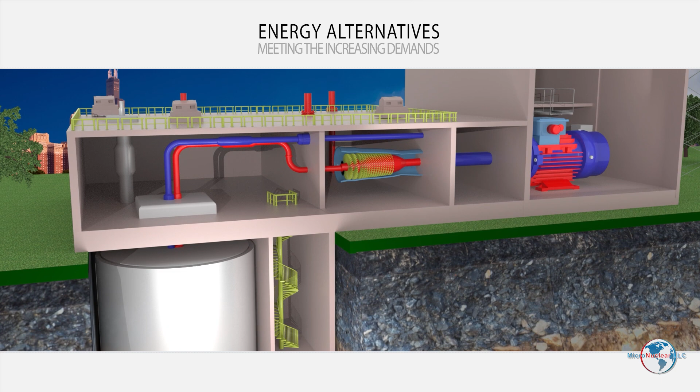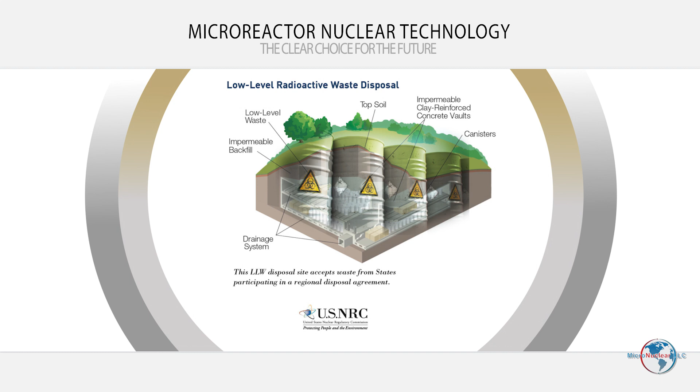When we examine the current realities of all forms of energy production, it becomes clear that only one technology has all the capabilities to meet the increasing demands of our planet: microreactor nuclear technology. This new type of reactor, from America's MicroNuclear LLC, employs a molten salt nuclear battery that, in a few short years, will be supplying a logical, safe, reliable, and economical solution that also resolves the issue of nuclear waste disposal.

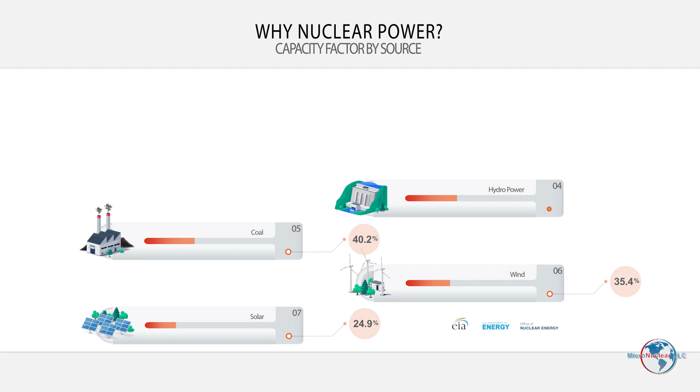To understand how transformative molten salt nuclear battery technology is, it is important to look closely at the specific requirements of competing technologies in their attempt to reach a goal of reliable, emission-free, environmentally friendly energy that is sustainable, reliable, and affordable. Capacity factors of these different technologies vary greatly, but none comes to the capacity of nuclear power, which is by far the most reliable and efficient.

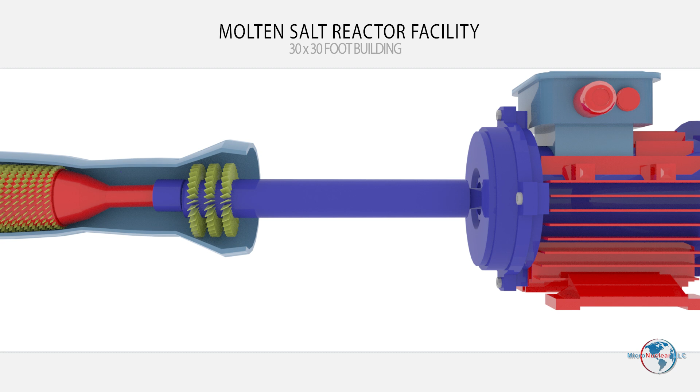The environmental and societal impact of generating facilities is massive. For example, a wind farm requires over 2,700 acres, while a solar farm can demand over 500 acres to produce the same 10 megawatt output as a quarter-acre facility that houses a molten salt nuclear battery. This is possible because the reactor vault and the commercial load equipment can be contained in as little as a 30-foot by 30-foot building installed above or below ground.

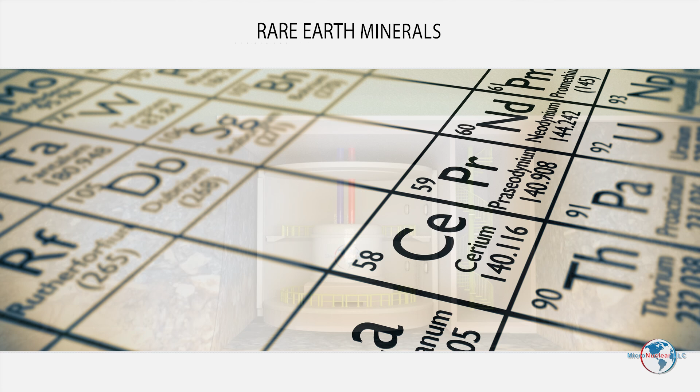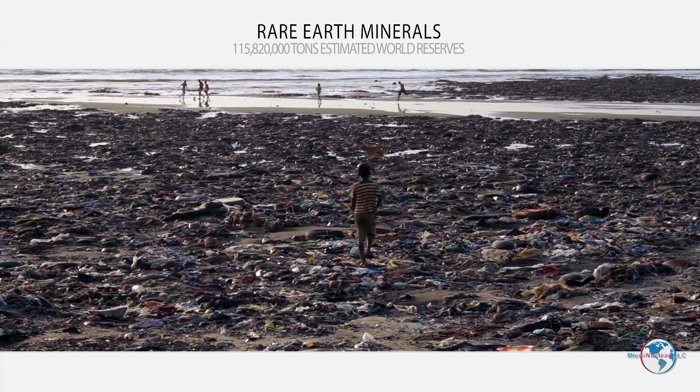Additionally, the reliance upon foreign sources for rare earth elements for battery production means energy security can be severely crippled by geopolitical events, while mining practices produce environmental and humanitarian crises around the world. The examination of all these facts makes the conclusion of the importance of nuclear power undeniable.

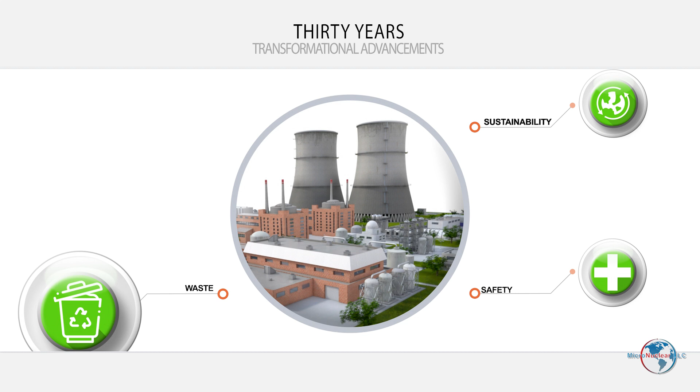But for over six decades, the perception of nuclear energy has remained unchanged, as the U.S. has failed to take advantage of the transformational advancements made in nuclear power science and technology over the last 30 years. The molten salt nuclear battery from MicroNuclear LLC will alter that course.

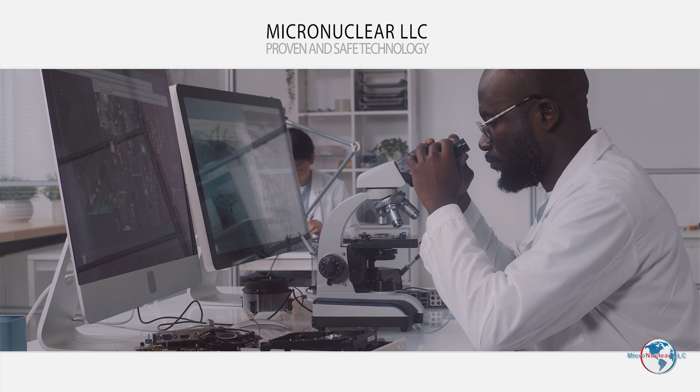At MicroNuclear, our primary objective is to revitalize and secure our energy needs using proven and safe technology that not only solves our existing energy needs, but opens an essentially unlimited potential to advance the security, reliability, and availability of our future energy needs.

Molten salt nuclear reactor technology is not a new concept, but one whose feasibility has been proven for decades, and the recent re-examination of that concept by MicroNuclear provides innovative design solutions that will change the entire energy infrastructure.

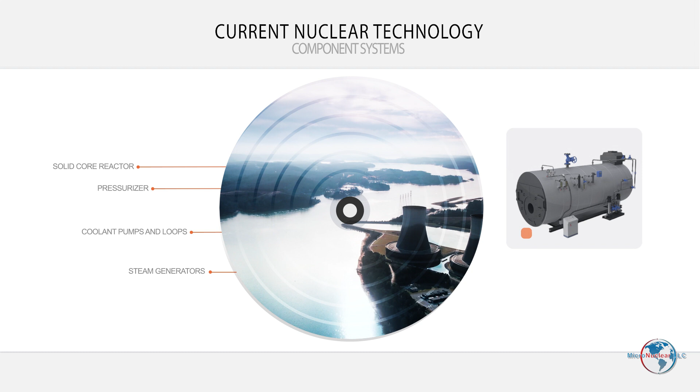To easily understand the difference between the molten salt nuclear battery and the traditional nuclear power plant, let's look at the operating flow chart of both systems. Traditional and current nuclear power plants are referred to as light water reactor systems with several components, including a solid core reactor, pressurizer, coolant pumps and loops, steam generators, turbine generators, cooling towers, and more.

These systems can reliably generate large amounts of electricity. 1,000 megawatts are not unusual. But those power plants require a large amount of land to do so, along with a complex operating system and support resources, many operational staff, and are very expensive to build and maintain.

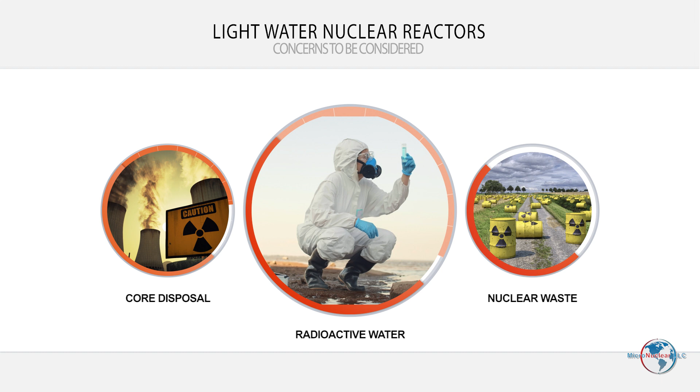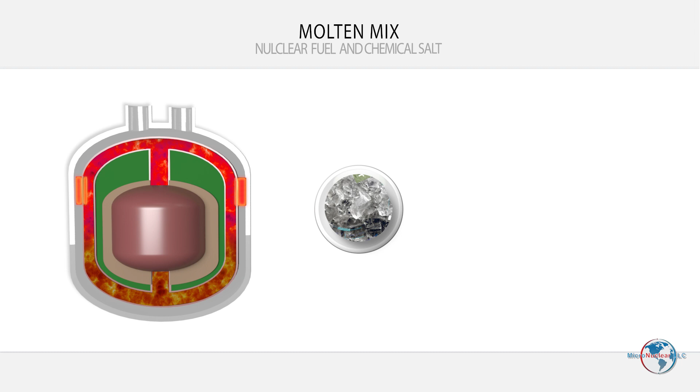The reactor core of the molten salt nuclear battery, or MSNB, is, as the name implies, a molten mix of nuclear fuel and a chemical salt. The salt in the MSNB is not your sodium chloride table salt. Instead, the MSNB uses fluoride salt because of its desirable characteristics when mixed with a nuclear fuel.

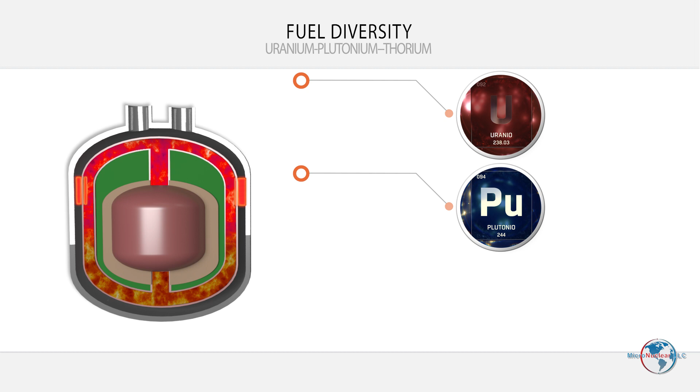As for the nuclear fuel in the MSNB, it can use either uranium or plutonium, and it can also run on fuel provided by thorium.

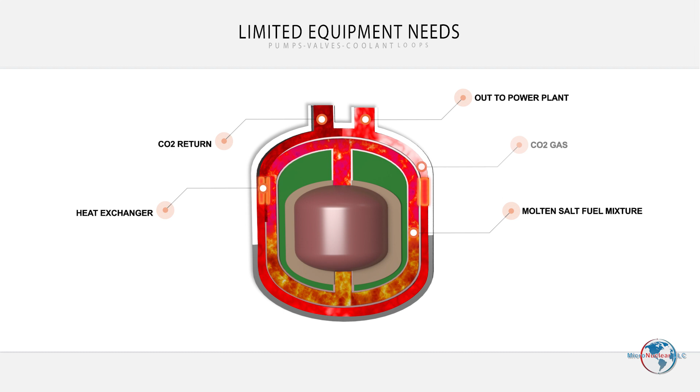Most importantly, the MSNB uses natural circulation to move the molten salt fuel through the reactor core and is thus designed without the need for pumps, valves, or coolant loops. The elimination of each of these components enhances safety and reliability while it reduces cost.

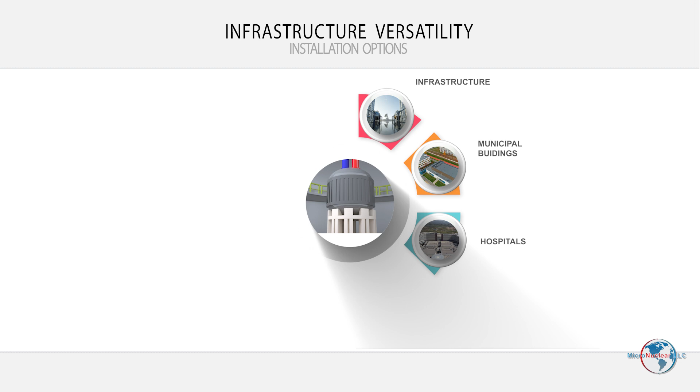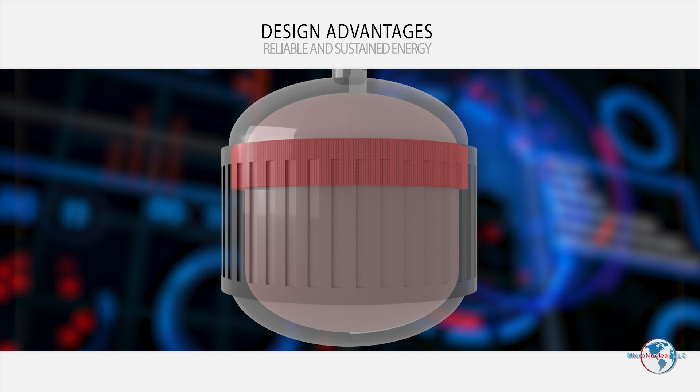It can be installed in critical infrastructure such as municipal buildings, hospitals, and military bases. It is ideal for industrial applications, desalination facilities, hydrogen production, and remote villages. The MSNB is designed to provide reliable and sustained energy, securing the absolute requirement of uninterrupted supply of energy.

Additionally, the MSNB development is mature. It is ready to produce the first prototype, be fueled with molten salt, and undergo operational validation.

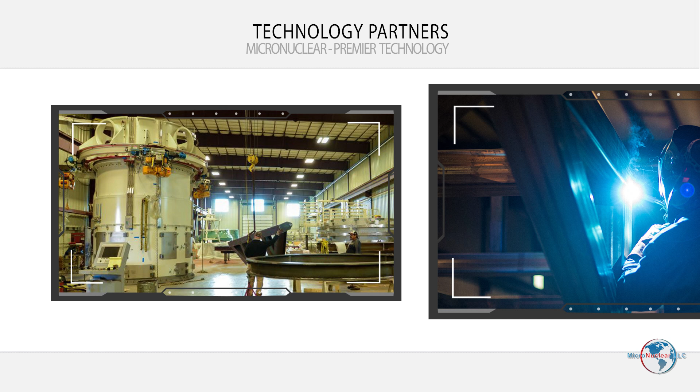Premier Technology is an industry-leading manufacturer of nuclear-grade equipment. Premier has supported MicroNuclear with the manufacturing of concept stage prototypes and has the facilities, personnel, and experience needed for full-scale production.

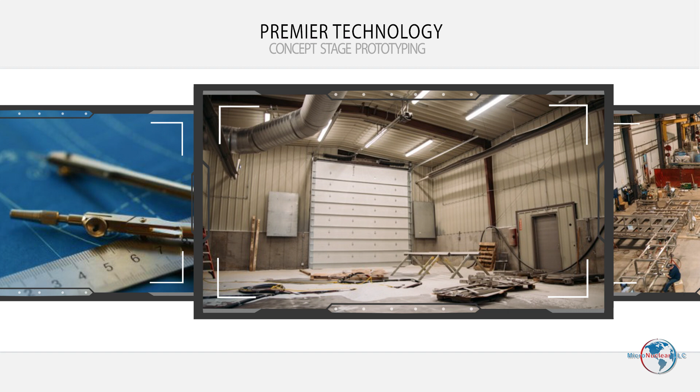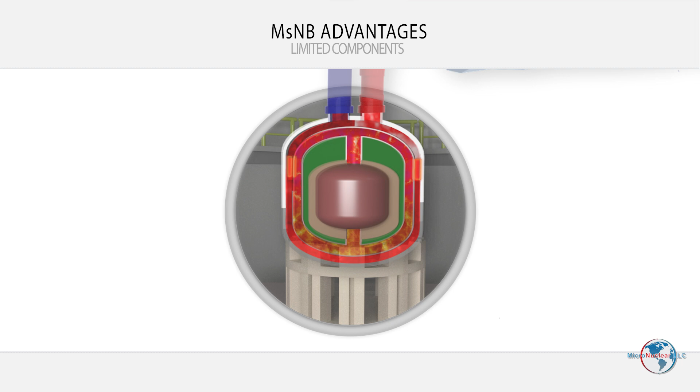Understandably, any discussion of nuclear energy centers on safety and nuclear waste disposal. As we have said, unlike current nuclear power plants, the MSNB has no pumps, valves, coolant loops, and uses natural circulation with a molten salt nuclear fuel.

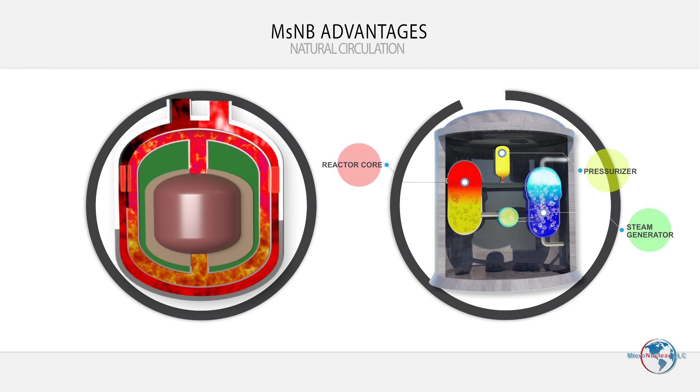It does not use traditional highly pressurized water for cooling. Instead, the MSNB operates at ambient pressure, and if the intended use of the MSNB becomes inoperative or is shut down, the MSNB simply and safely goes into a hot standby condition.

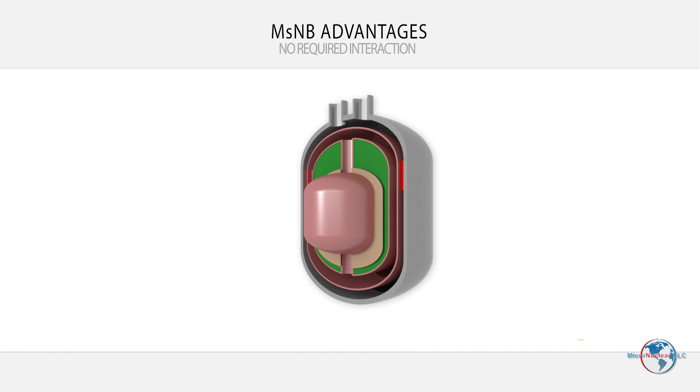The process is so inherently safe in its design that no action is required on the part of an operator. This means the MsNB is walk-away safe.

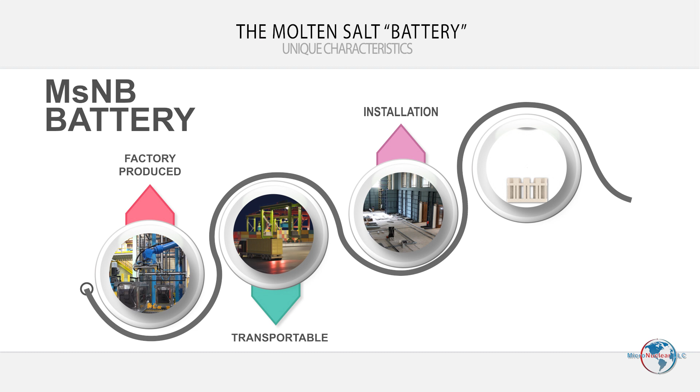We refer to the MsNB as a battery because it is manufactured in a factory, transported to the site, installed, and at the end of its 10-year life is simply replaced with a new MsNB.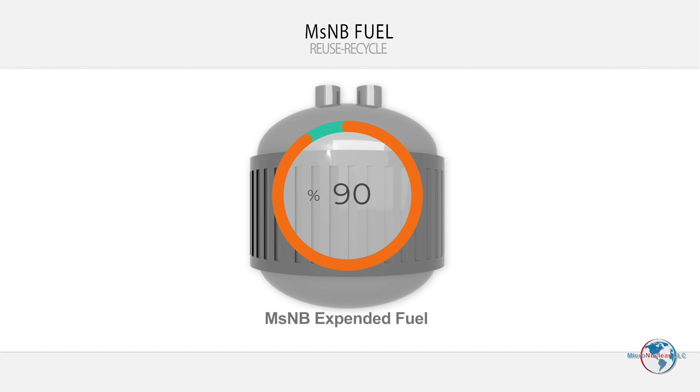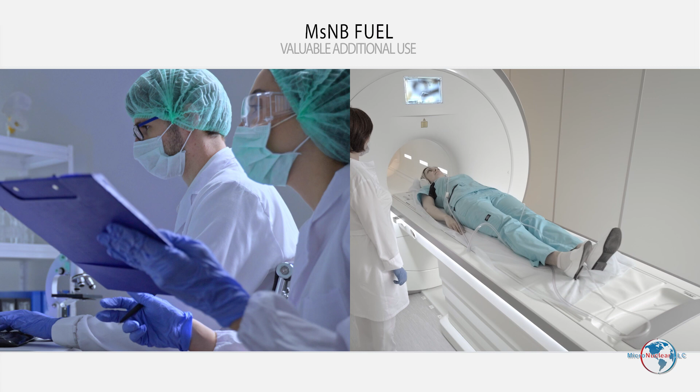Unique to this technology is that 90% of the expended fuel can be reused in subsequent MSNBs. In addition, the leftover 10% are products that will be separated from the salt and will have valuable commercial medical uses. The remaining waste, amounting to only a few kilograms, is safely disposed of in a repository until levels are essentially the same as natural background radiation you experience every day.

Comparing this to the tons of waste from an expended solid reactor core, the benefits of the molten salt nuclear battery are undeniable. The need for a long-term sustainable energy plan is inarguable. There is no other path to a green, emission-free, feasible, and proven scientific solution besides nuclear.

We have learned it is the molten salt nuclear battery that can logically and scientifically overcome preconceived objections and bring us to the energy solution we need.

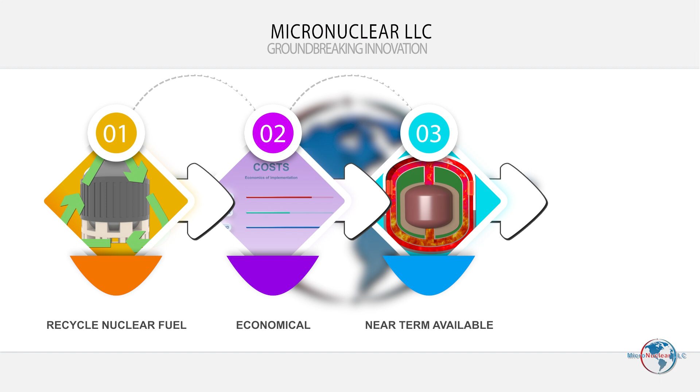We have learned that MicroNuclear has designed the MSNB to recycle nuclear fuel, essentially nullify the nuclear waste disposal issue, be economical, be near-term available, and most importantly, be safe. Walk away safe.